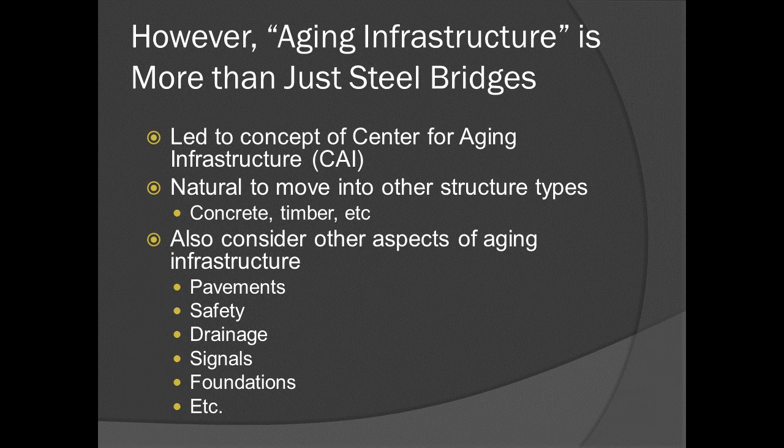So the Center for Aging Infrastructure is really what I'll show you pictures of, but S-BRITE is considered like a user. It's under the umbrella of the Center for Aging Infrastructure. And our hope in our master plan is to include other aspects of aging infrastructure as we move forward. So the grand vision, the 40,000-foot view, we think we've put together over a couple of years a pretty unique place focused on aging infrastructure and how to extend the life. Right now we're on the steel side, but hopefully down the road we'll expand to other materials.

So where are we today? Well, Indiana obviously took the lead in the center. They made major commitments to develop the facility I'll show you, but also funded projects to keep the place going.

We had these short courses that I'll talk a little bit about. Some people in the room have taken some of our courses from the partner states. Another acronym, at the university, we want those, right? So we came up with this idea of the DEN, the Distributed Expertise Network. I'll talk about that. And then our outside facility, which is now developed.

However, it became apparent that the problems we have in Indiana, or the needs, I guess I should say, are kind of common to all state DOTs, right, with aging infrastructure. And so we have several states who are on board as partners of TPF 5281, a pooled fund study, and I'll talk a little bit about that. We have commitments, at least verbal commitments, from Utah to join the center, as well as the Army Corps. And we're always looking for more partners.

And what we envision is sometimes maybe a state would partner for a while and get some benefits, maybe come out for a while, maybe then jump back in, right, as they have training needs and whatnot. But it's meant to be very flexible in terms of what we can provide.

And so it literally started on my desk with a sheet of paper, kind of drawing up this idea that, when we have an old structure and we take it out of service, we take pictures of it, we put it in PowerPoints and say, yes, see, there was a crack, or there was some corrosion, or some kind of bad detail, don't do that, here's a picture. And I guess my idea was, well, why don't we keep some of those things and use them for training purposes, where we could walk out and teach individuals, put their hands on something.

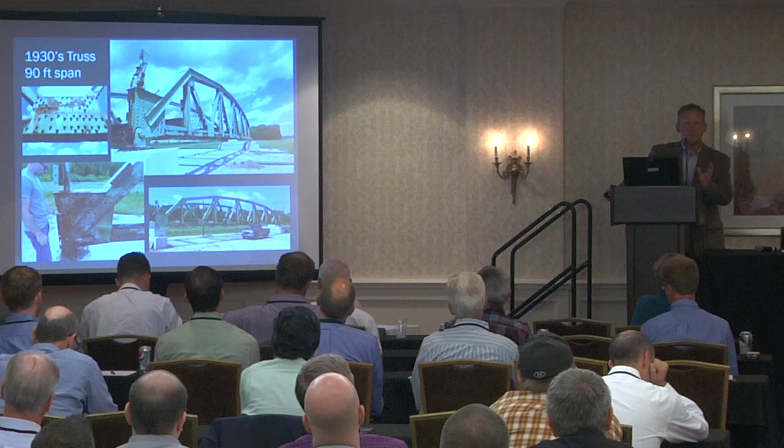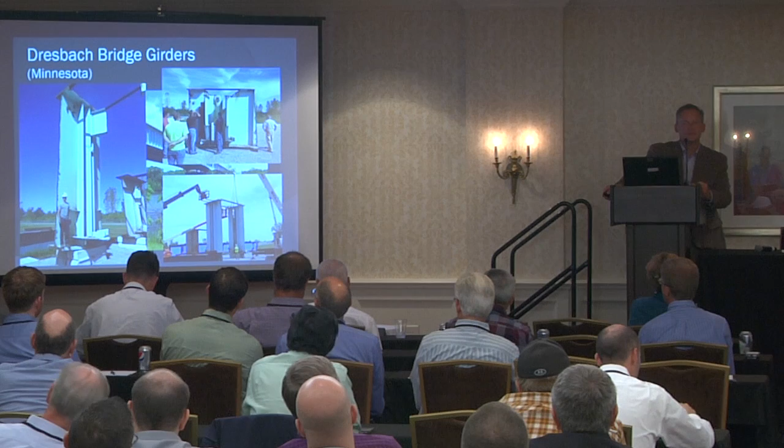However, not only did we get the big girders and the details associated with them, in fact, we had to lay them long way on the truck. They were so deep, so it limited the length of girder we could get. Only a handful of bridges in the country have girders this big. A very nice pin and hanger detail, so you can imagine issues with inspecting pin and hangers, a series of bearings, a series of gusset plate connections, and so forth. So these are the big girders now. For scale, where Jason Lloyd is standing there, that flange is about 3 feet wide and 3.5 inches thick. Massive girders. So again, great components for us to have here.

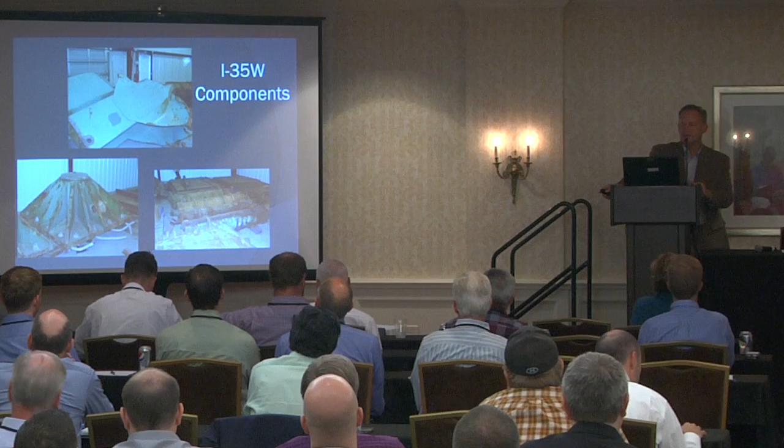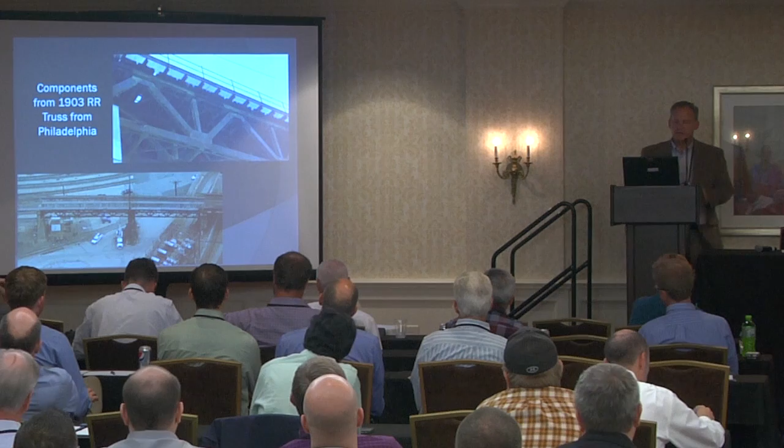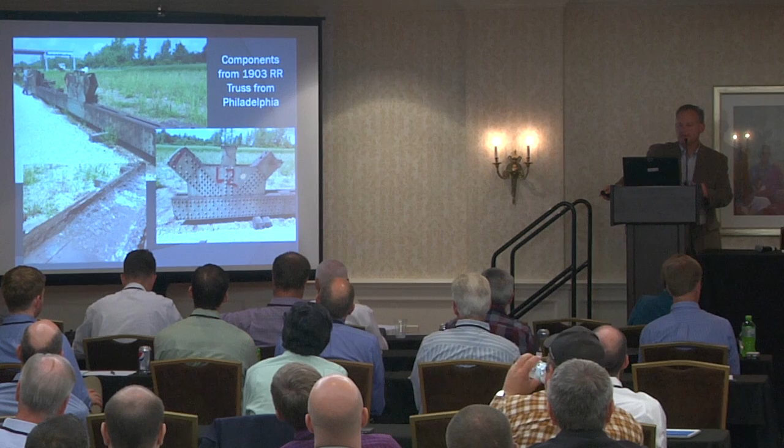The railroads have also been very generous. CSX has donated some pieces of a railroad bridge just outside of 30th Street Station in Philadelphia, an old truss from 1903. That has corrosion and section loss like I've never seen in my life. This was a top chord of this deck truss, so the trains were running right on that chord, and it was carrying full Class 1 railroad load till the day they took it out. Excellent components to use for training, fatigue detailing, like what to look for. There's some funny things on some of these chords and welded attachments that shouldn't be there. Great components for training.

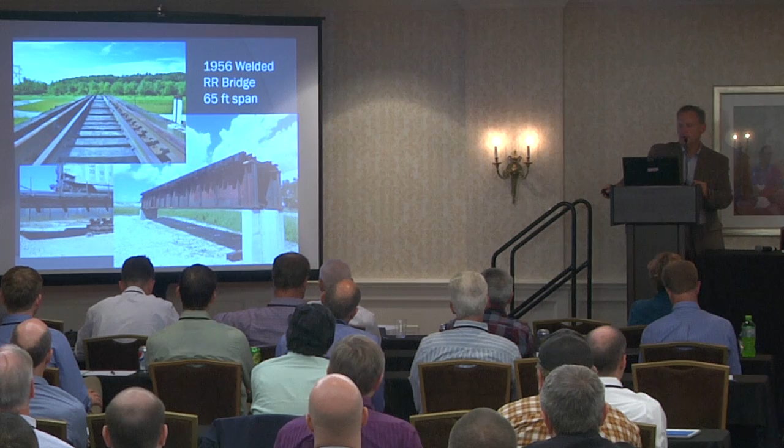We also have an entire railroad bridge. The bridge is from the 1950s. It's all welded, which is very odd for a railroad bridge from that period. Pennsylvania Railroad is where it spent most of its life, in Jersey City, New Jersey. Then it spent time out in Pueblo, Colorado at the research facility there, TTCI. Now we have 22 acres, which is impressive. They have 55 square miles. They have a giant train set. If you ever get a chance to go out there, I'd encourage you to do it. We were able to get rails and ties donated to it. It has a whole series of fatigue cracks in it, various details, Hoan details, retrofits, some fractures in it, all kinds of things in it that are very useful for training purposes.

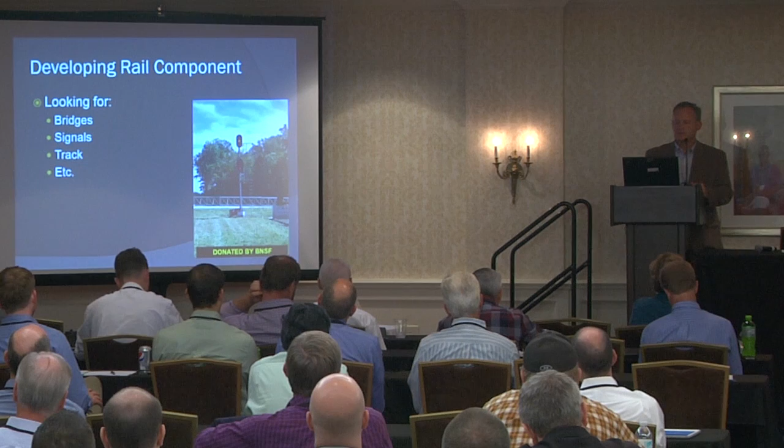In fact, our rail component is something we're working on. We want to develop that more. At Purdue, we're Boilermakers, and some of you may have seen the research we're doing on driving our own hot rivets for some tests. But we want to get our rail program back up and running, and so one of the things we're getting now, BNSF sent us some signals. We hope to put in some track with switches, actually. In our master plan, we have about 1,000 feet where we can put in paved road and railroad track. So we're hoping to get that a little further developed.

And a lot of other components, without getting into detail, that we use for the inspection and training portion of the center. Really, really fun to have these things. And again, I can't emphasize enough the training environment, the feedback we get. How many people here have taken one of our courses, just out of curiosity? So a few. Talk to these folks.

We've gotten great feedback on these courses and what we have in terms of the specimens, and talking to the partner states, because we think it really makes for a great environment. And training is a major focus. Now, I actually have to run back tonight because we're doing our Inspecting Steel Bridges for Fatigue course tomorrow and on Wednesday. But we have other courses.

We have 5 in our sushi menu now that partners are able to send people to. If you're a partner, we will come and give you any one of these courses. If they're at Purdue, they're longer because we get to go out to S-BRITE. If they're at your facility, they're a little shorter because we can't go to the facility.

Designing steel bridges for fatigue and fracture, welding in the infrastructure, which we do with Fish and Associates. Phil Fish has been really helpful and supportive of the center, as well as high-strength bolting that we do with Fish and Associates. And Phil helps us with our fatigue course. But I'm going to focus on that second one, implementing effective retrofits on steel bridges.

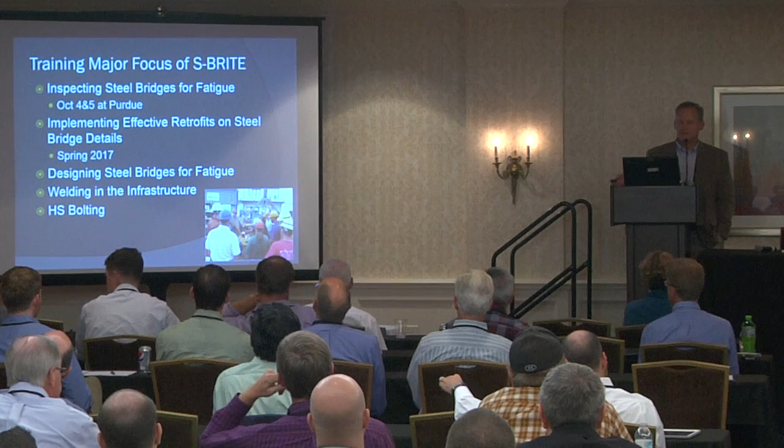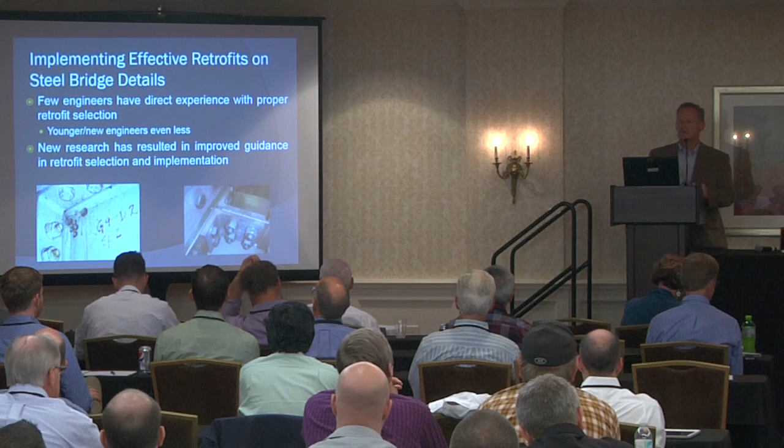That's our newest course. We've had some issues in Indiana where some fatigue retrofits maybe weren't the best selection. It was maybe a lack of understanding of some of the retrofitting strategies. And there's some research that's been done to maybe update how we would do some of the fatigue retrofitting. And so the thought was, well, let's have a course focused on that. But we don't want to just do death by PowerPoint.

And so one of the neat things, and I know there's some people here who have taken this course, is that you get your own specimen. So this would be like a Hoan Bridge retrofit where you have intersecting welds. And you have to fix it. You have to implement the retrofit, and you are graded on the quality of the retrofit that you do. And so the students are out there and they're working. So we spend time in the classroom, then we go out and implement a retrofit.

Now, right now, INDOT's pretty much the only folks who've been taking it because, contract-wise, we're running them through it. But the objective would be to put this out on the street for other individuals. We've got a lot of interest in this right now. And there's a whole series of different retrofits that individuals would go through. So it's kind of a fun course.

We did 2 beta versions of the course to work the bugs out. The first group, some of you may know Merrill Doherty, and I thought we were going to kill him because we had way too much to do. The second course, we wore some people out. I think the third one now is a little more manageable with the type of retrofitting that you do.

One of the other aspects is this idea of the DEN, the Distributed Expertise Network. And this has also been quite successful, I think, where states who are partners have access to a group of individuals. At least the states I'm familiar with, you don't have the budget to have the welding expert, the coating expert, the fatigue expert, and all this. And sometimes you don't want to reach out to some expert, maybe at a university, because you don't want to bother them or you're not sure you'll get a response.

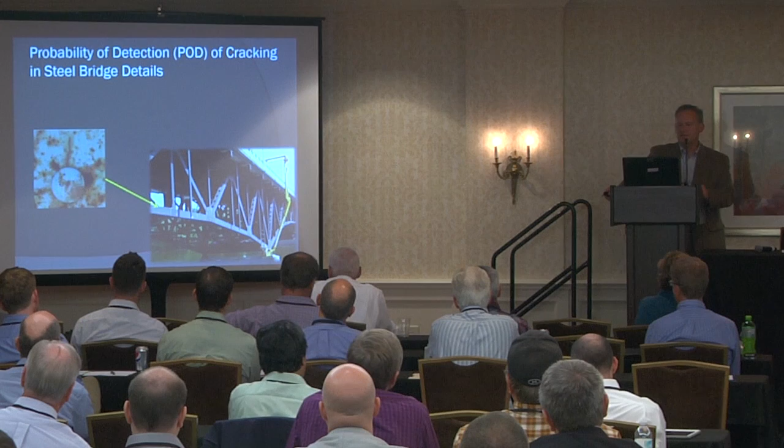One of the specific studies I'll talk about is this POD. So this would be an example of a research project, probability of detection. And this is one I'm working on a lot with Glenn Washer. So you have this riveted structure. I don't think the structure exists anymore. I always say that, so this isn't anybody's specific structure. But the probability of finding, say, a fatigue crack at one of those rivets, right? And so we spend a lot of time looking for things, and we have no data that would say what's the likelihood of finding a 1-inch crack at a rivet hole or at a weld toe or an out-of-plane distortion crack. And so what we did is we built our test bridge.

And in there, we took all the exciting details. So you imagine on a plate girder, between panel points, it's just web to flange weld at most. That's kind of dull usually. So we kind of compressed that down. And this represents about 450 to 500 feet of 3 separate girders with a painted span and a weathering span. Now you can't get caught up that there's a negative moment region or anything. It's just details. But in here, there's details that are riveted that may or may not have cracks. We have cover plates that may or may not have cracks. And out-of-plane distortion details, apparently there is a crack, right? These are all real specimens that have real fatigue cracks in them that we have the treasure map for, of different sizes, different locations, and so forth.

And what we do is bring inspectors through. And it isn't to find fault with inspectors. It's not at all to do that. The objective is to try to figure out what is it that we're missing, and how do we tie that in then to the risk-based inspection strategies that I'll talk a little bit about coming forward. And then is there some training that we could do or simple tools required, maybe a certain type of flashlight or family of flashlights, that would improve this detection, or that you need a magnifying glass.

You know, one of the things we found is a lot of inspectors who come through have never seen a fatigue crack, or at least a confirmed fatigue crack. And that's okay, but until you really know how to look for a fatigue crack at a cover plate, I can tell you the data would say that it's pretty unlikely you're going to find one of those. And so again, it's not intended to find fault. We really want to try to figure out how do we do this better, especially in the context of risk-based inspection.

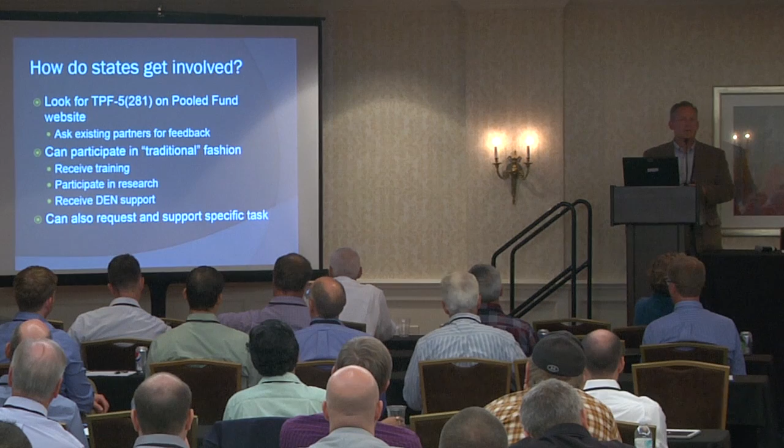One of the questions we get is how do states get involved? Look for TPF-5(281) if you go to the Pooled Fund website. I would encourage you to ask the partner states or people from those states what they think, because we've had great feedback and many of the states are continuing to support. Now, you can participate in the traditional fashion, and what I mean by that is there's a certain fee for a certain level of support. You can come to our training. We will come and offer you training. You get kind of a seat at the table when we're laying out research and the DEN support.

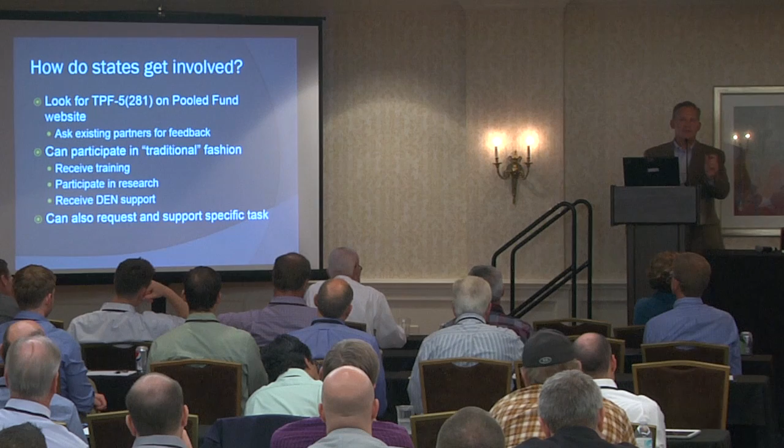But I think one of the things that's really neat, when we developed this, it was specifically intended for partner states or other states if they have a specific task they're interested in. So I'll give you an example. MnDOT is a normal partner, right? They come and we do training and we work with them. But they also had a specific need related to the Winona Bridge, some testing that needed to be done on some big truss members. So they were able to carve that out as a separate S-BRITE task.

Now what's nice is S-BRITE exists, that pooled fund study exists. So we don't have to go through all the contracts and all the rigmarole with that. It's a special task within the center, just with a unique scope. Another one, Wisconsin. We've been doing a lot of work with Scott Becker. Now, they're not a full partner state, at least not yet, I hope they'll join. But Scott had a specific need related to fracture critical bridges. And so what we're able to do is very easily and seamlessly, he can become a partner for a specific task. And what we're looking at is some modeling on several twin tub girder bridges for him.

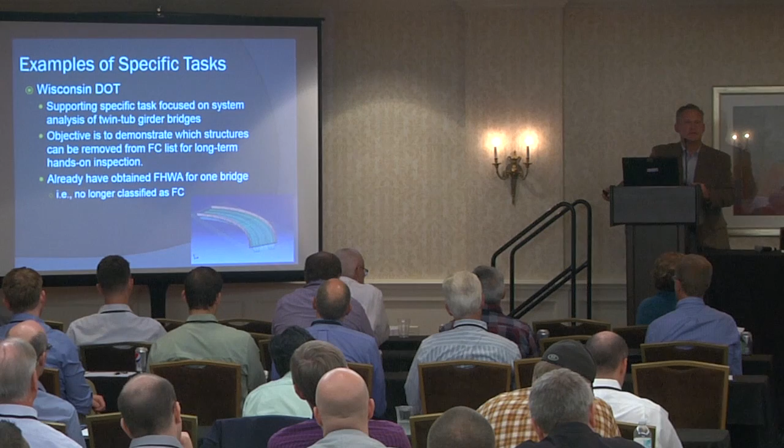And what we hope to do is to be able to take a lot of these off the fracture critical list by applying the 2012 memo from the Federal Highway. And I can say we've already gotten one bridge approved. And that was our beta bridge to make sure our process was consistent with what the feds want. And now we hope to roll through on a bunch of other bridges and get several off the fracture critical list.

The other project, though, that now we are proposing, so those are existing ones, special tasks, but one we're working on with Glenn: NCHRP 782 is the project that some of you might be familiar with that he led that was looking at risk-based inspection. And if you know, MAP-21 is requiring that. One of the things that we think would be very good to do is try to standardize that, take that research and make it into more of a standardized approach so that every time a state goes to the feds with their procedure, it isn't being reviewed separately and coming under scrutiny and that there's 50 different approaches.

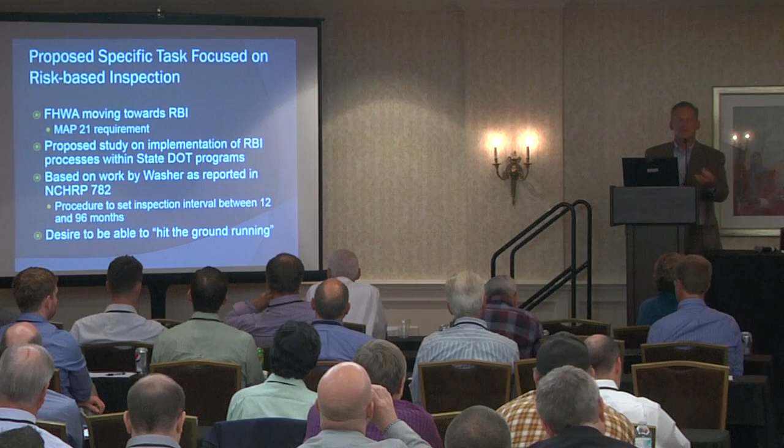Now, while the approach is specific to states, this would allow us to have kind of a standardized approach and very good guidance available on how to do this, so that when this becomes available, because it looks like it's required by MAP-21, the state would be able to hit the ground running. Now, we've started this in Indiana. We're already trying this out so that when it's available to be used, we can say, ta-da, here's our risk-based approach on how to do bridge inspection. And so the goals would be to have a handbook available, what methodologies, how do we tie this into preservation and so forth.

And one of the neat things, Glenn had a neat idea: there's a lot of talk of UAVs. Well, how does that work into this new framework of inspection, right? And so this may be someplace we're partnering with S-BRITE in terms of overall reliability or UAVs or different technologies. How does that play into this new method of setting inspection intervals? So kind of a neat project. So for costs, estimating, we'd like people to at least make a 2-year commitment in the $50K per year approach. Looking at least 6 states and be part of the pooled fund. And again, talk to Glenn.

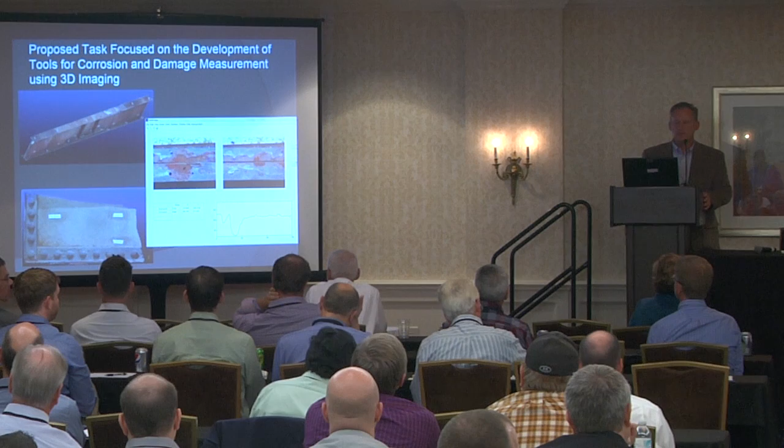And then another little project I'd like to share is some things we're doing, if we have some interest, on 3D imaging, where we just use photographs to measure corrosion and damage in girders. An exciting one, and I'd be happy to answer any questions on that, where we can just take pictures of things and measure corrosion and damage. And so in summary, we've got a lot done in 2016. Our training is going to continue. Look at our website for that. We look to develop a partner program with industry, with consultants and so forth.